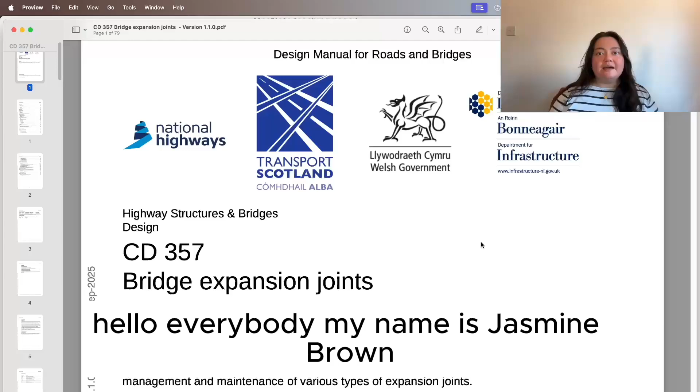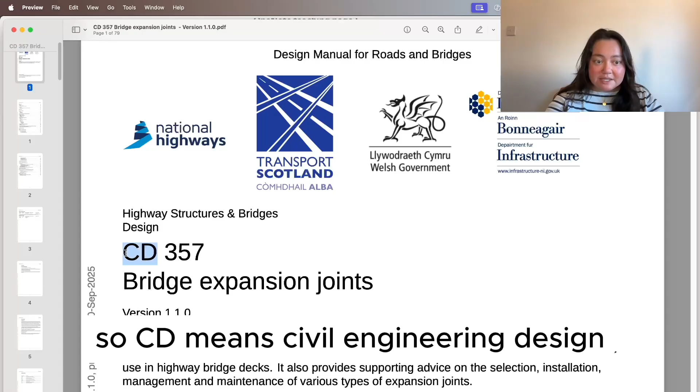Hello everybody, my name is Jasmine Brown, and in this video I'm going to be discussing the DMRB's CD357 bridge expansion joints standard. As usual, I like to break it down. So CD stands for Civil Engineering Design, and the 357 is just a number that helps you find the document.

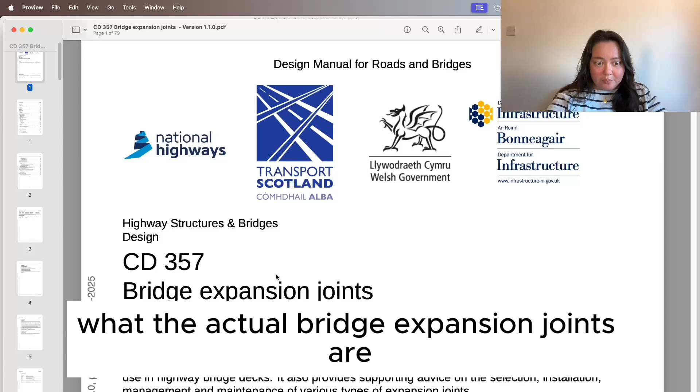The aim of this video is just so you can start identifying these different expansion joints yourself when you start reviewing expansion joints on bridges. I'm going to go straight to Appendix A because there's no point in me talking about this document without you knowing what the actual bridge expansion joints are, and I'm going to show you Table A.1. So this shows you the families of expansion joints that this document talks about.

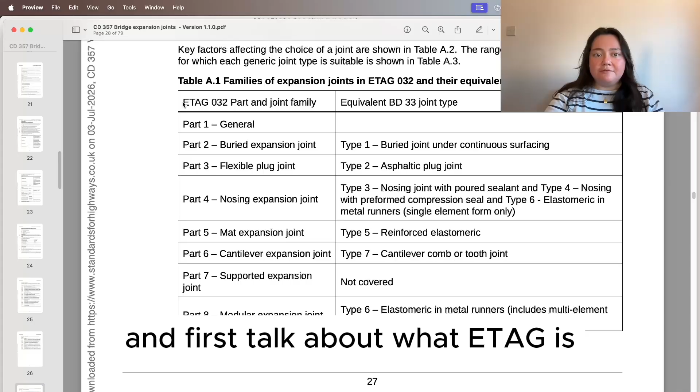So I'm going to take it back a bit and first talk about what ETAG is. Basically, the names of the joints came from this document, ETAG number 32. It's a European standard from the European Organization for Technical Approvals. And ETAG basically just stands for European Technical Approval Guideline, and then it's number 32. Okay, but this isn't the standard that I'm looking at the moment. I'm going to be talking about CD357.

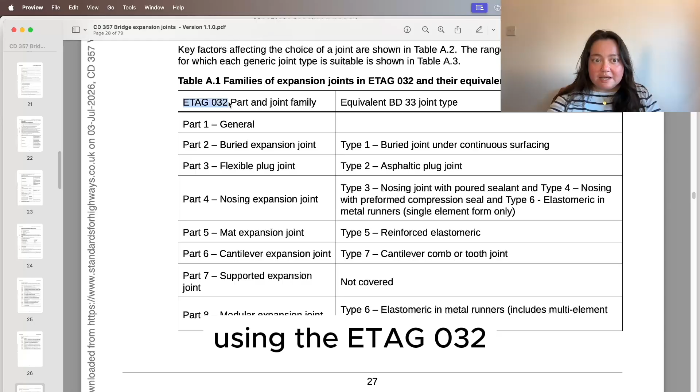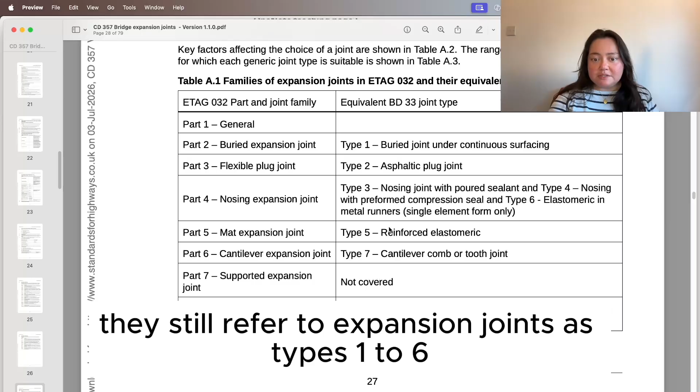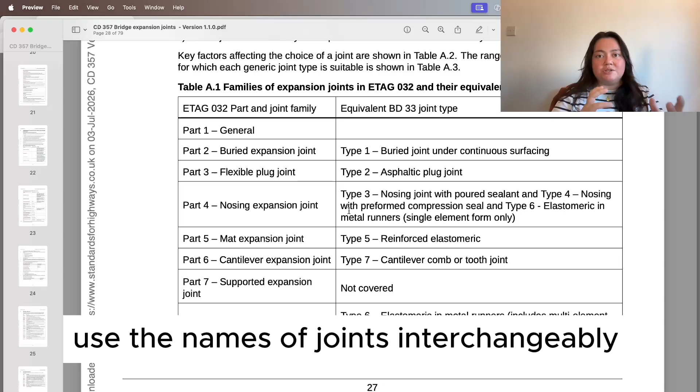These are the new names on the left-hand side using ETAG 032 instead of the old way that we used to name the expansion joints. Though when you talk to contractors or some people within the industry, they still refer to expansion joints as type 1 to 6. We use joints part 2, buried expansion joints, all the way down to part 8, modular expansion joints. Don't get caught up when you talk to people within the industry because they use the names of joints interchangeably.

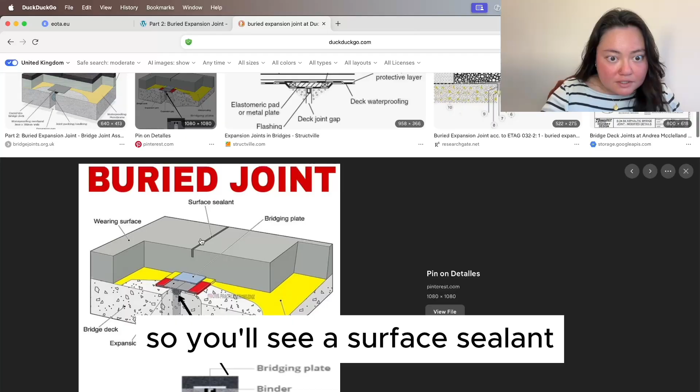It's an in-situ joint consisting of an elastomeric pad or flashing placed across the expansion gap to support the surfacing, which is then laid continuously over the joint. Movement range is plus or minus 5 millimeters. Typically, you won't see the buried joint on a road. You'll only notice that it's there because there's a crack inducer on the road. Here's another good one. So you'll see a surface sealant, which will signify that there's a buried joint there.

And then there's part 3, flexible plug joint. An in-situ joint consisting of a band of specially formulated binder plus aggregate, typically 500 millimeters wide and 100 millimeters deep, running across the road above the expansion gap. They accommodate movement of plus or minus 20 millimeters. And this is what it looks like. This is another good picture. There's flexible material, and then here's your expansion gap.

And then it typically looks something similar to this. Okay, so typically it looks something like this. So just imagine this is the surfacing of the road, and then this is the flexible material. It's usually, as it says in the description here, 500 millimeters wide and 100 millimeters deep.

So part 4, nosing expansion joint. In-situ resin or cementitious nosings placed either side of the bridge deck gap to produce firm edges and protect the surfacing, complete with watertight preformed compression seal or sealant. Here's the associated picture. Part 5, mat expansion joint. I won't read the whole thing because I'm sure you can read. Typically they look something like this in the real world.

And then this is a cantilever expansion joint. So these joints are like tooth joints, so they interlock like this, as you can see in this picture. Supported expansion joints, part 7. These are designed to accommodate large movements with good riding quality. Modular joints are also known as elastomeric in metal runners, and they look like this. You'll see these on bridges quite a lot.

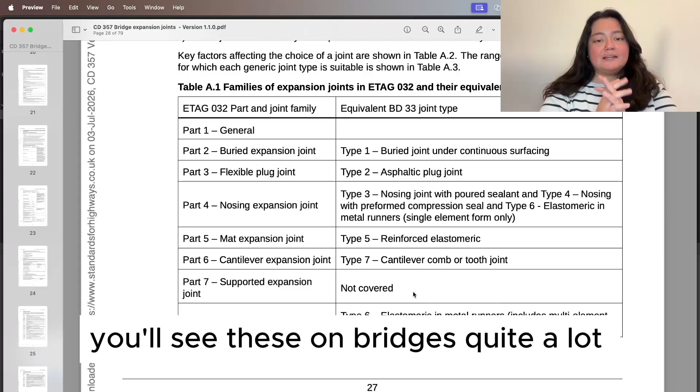Okay, so I'm going to wrap up the video here. Thank you so much for watching this introductory video for junior engineers to start identifying the different types of expansion joints they can find on the network.

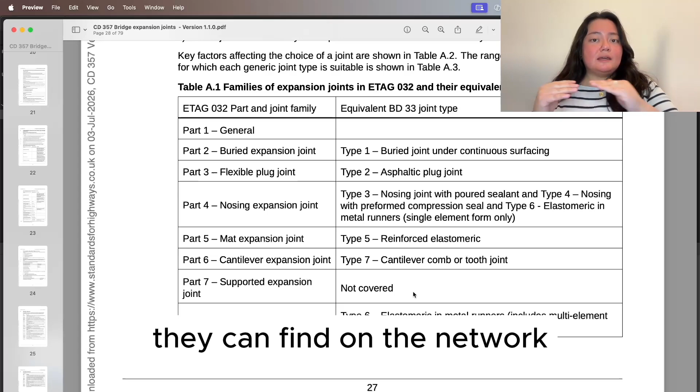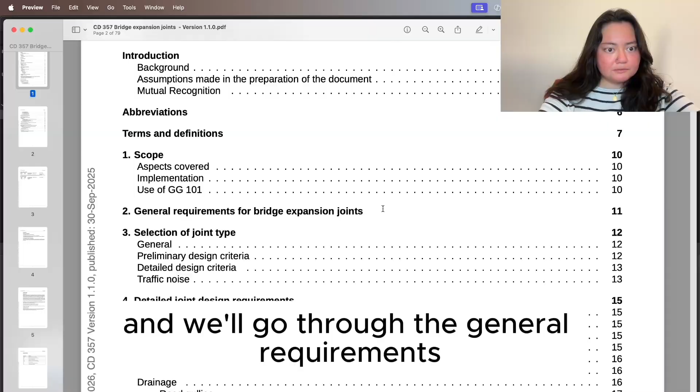And I hope to see you in my next video. I'm going to do a part 2 on CD357 to discuss the other parts of the document, and we'll go through the general requirements for bridge expansion joints, the selection of joint types, etc. I'm going to break it down.